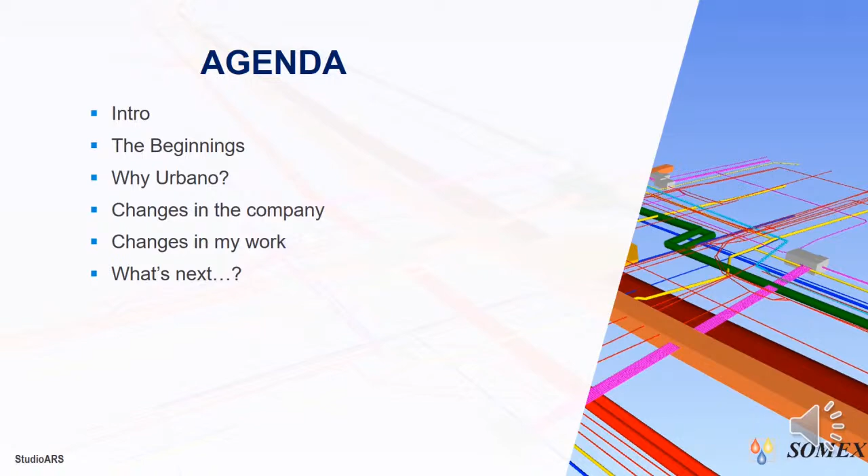Hello everyone, my name is Joanna Karczewska. Today I will present to you my way to BIM in the presentation Network Modeling, a coincidence or a conscious decision. Agenda: short intro about me and the firm, our beginnings, why Urbano, changes in the company, changes in my work, what is next. I am a designer in SOMEX.

SOMEX is a small company. The company employs 7 people, 3 of whom work in the BIM standard. We only design networks: water supply, sewage, gas, heating, and sewage pumping stations. SOMEX designs primarily in Warsaw. In the company, I am the driving force of BIM. I am responsible for implementation, development, coordination, and training in BIM.

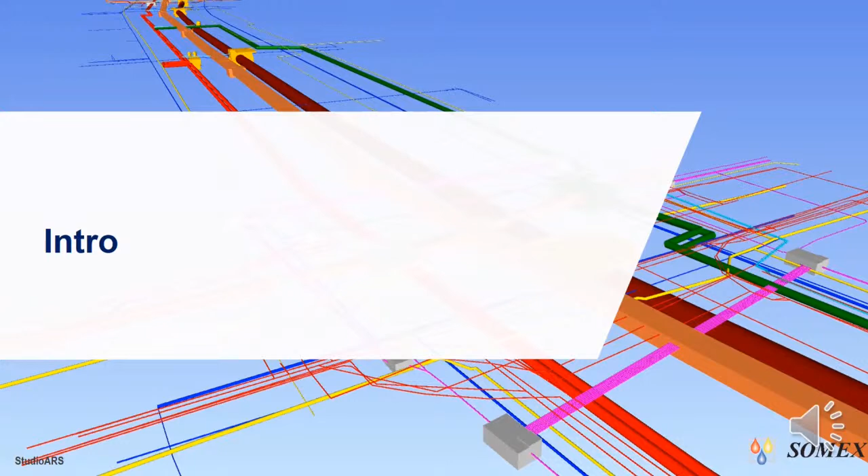Thanks to over 20 years of professional experience, I was also a site manager and supervisor inspector. I can discover and use the potential of BIM. I can also point out its new path of possibilities.

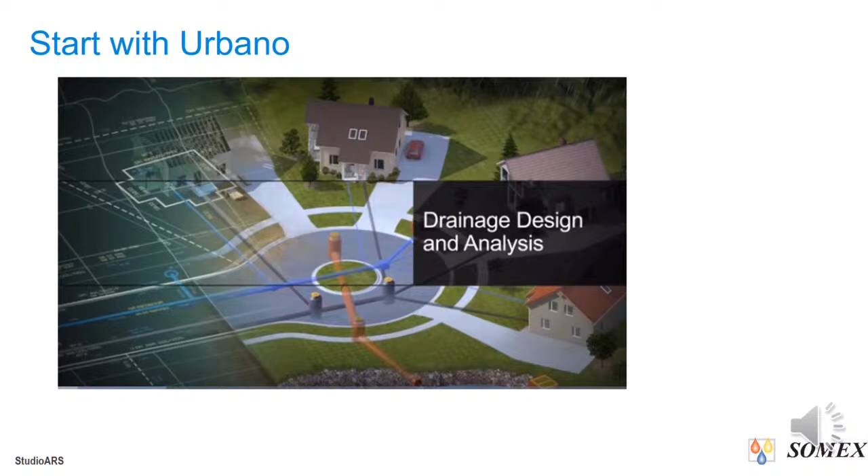8 years ago, we were looking for software to calculate rainwater drainage. Our first choice was Bentley. We tested the software and we did not like it because of difficult work with the software, complicated data entry, no choice of language versions, and high price. On the plus side, they have great visualization of the network. So we were still looking for something for us and we discovered Civil 3D and Urbano.

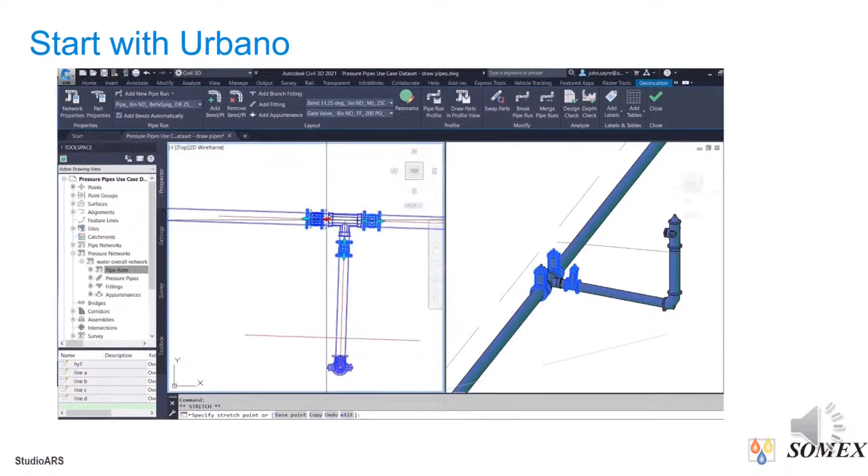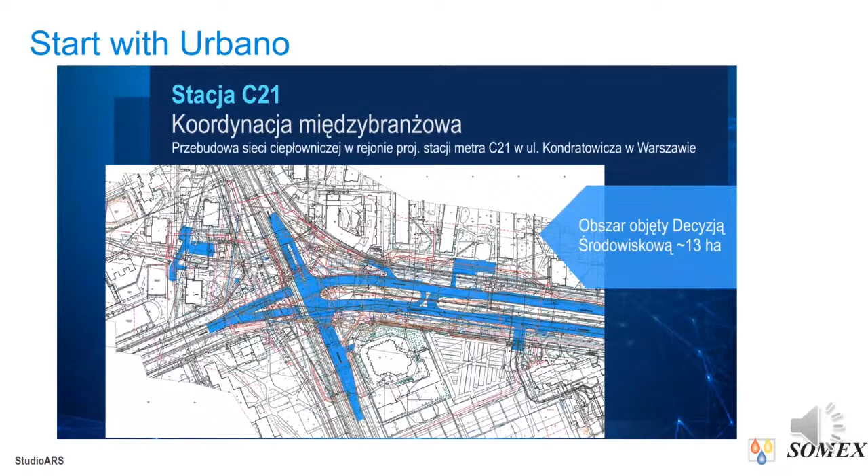Unfortunately, Civil 3D itself did not meet our expectations, and we got a cooperation offer to co-design 2 metro stations in Warsaw in the Targówek district. Our task was to reconstruct heating networks. There was only one hitch. We had to do the project in Urbano. Fortunately, we had already worked on this software.

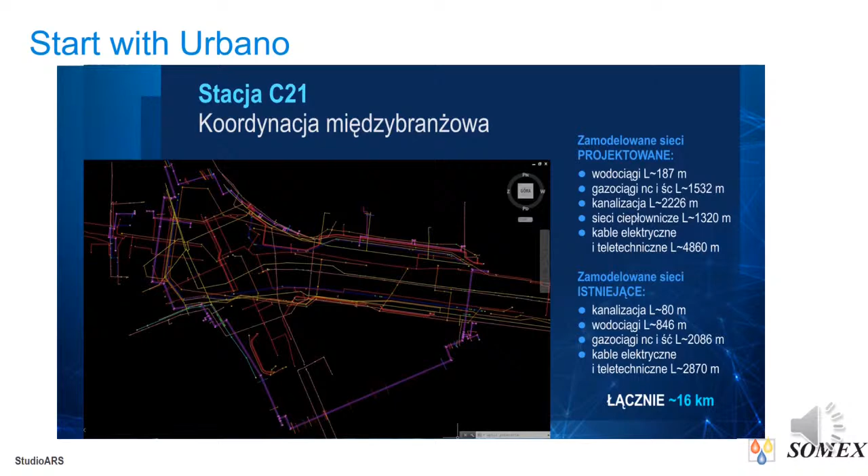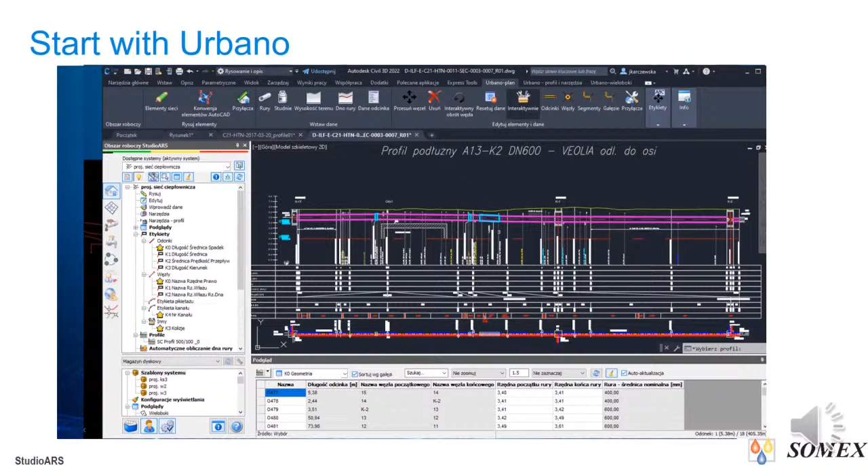We undertook this task. It was our first big test of work and co-work in the BIM environment. Fun fact, we are still modeling in BIM, but our partner is not. In our company, there is no obligation to work in BIM. Therefore, I personally chose what I wanted to do in Urbano.

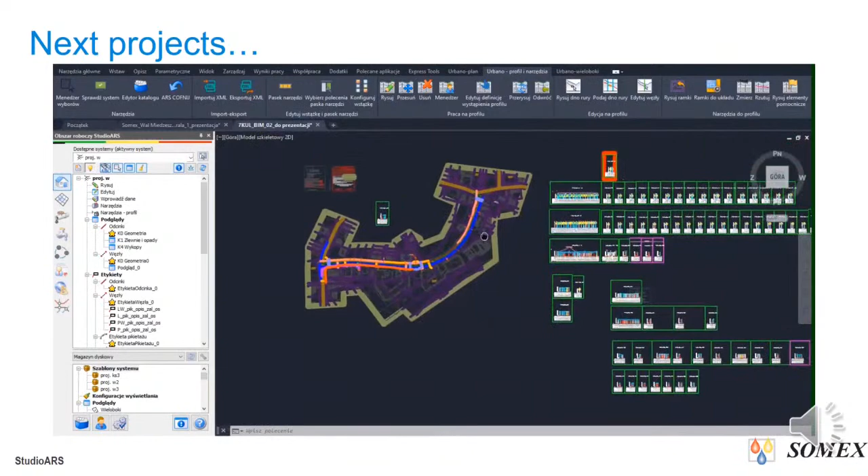At the beginning, I had three reasons for this: projects of long networks, several networks in one area, and the necessity of variant solutions. Now I do all the projects, regardless of their size, in BIM.

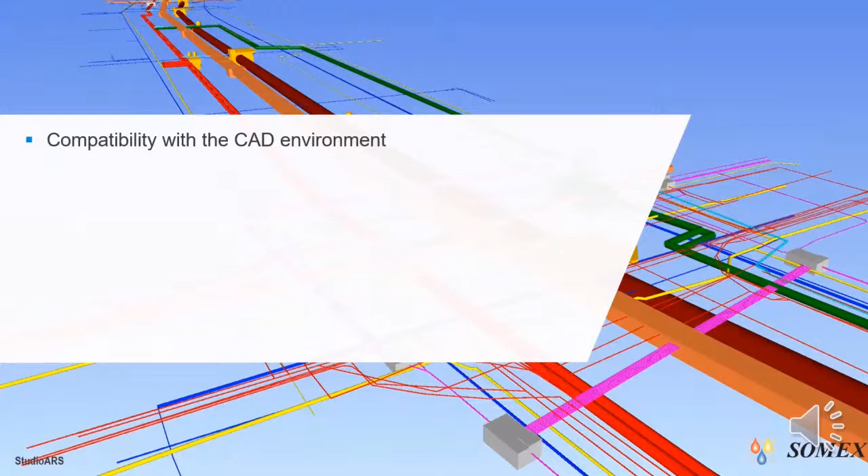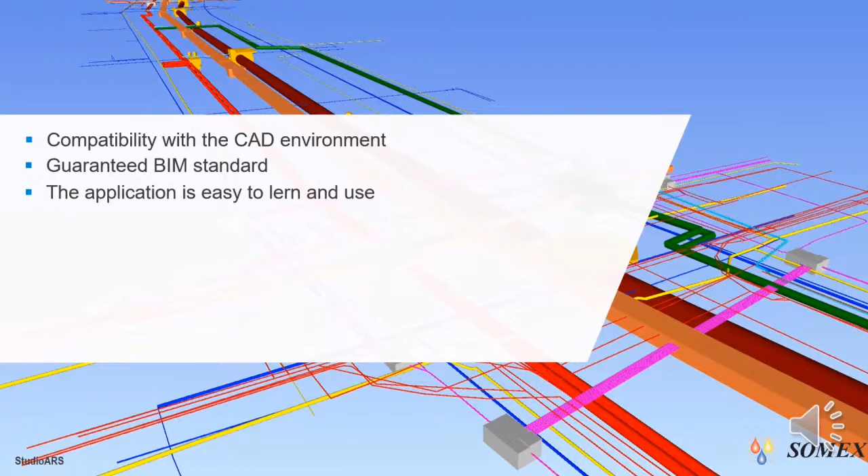Why we are still working in Urbano. The application has compatibility with the CAD environment and a guaranteed BIM standard. The application is easy to learn and use. Additionally, the application was developed by sanitary engineers for sanitary engineers.

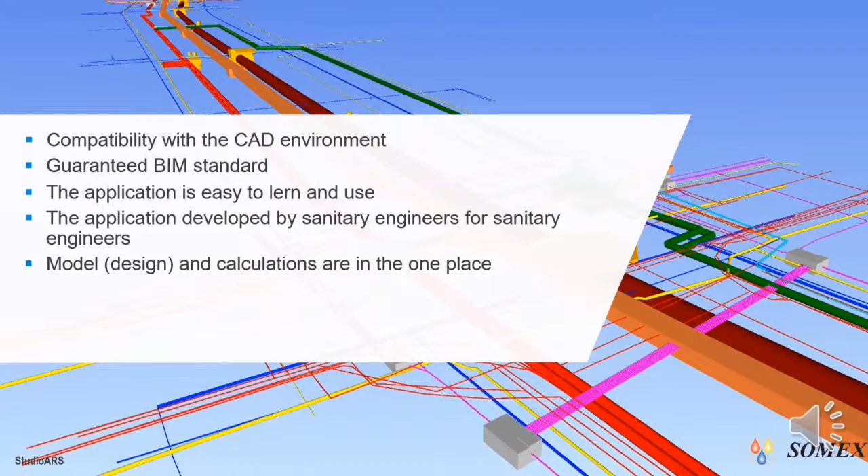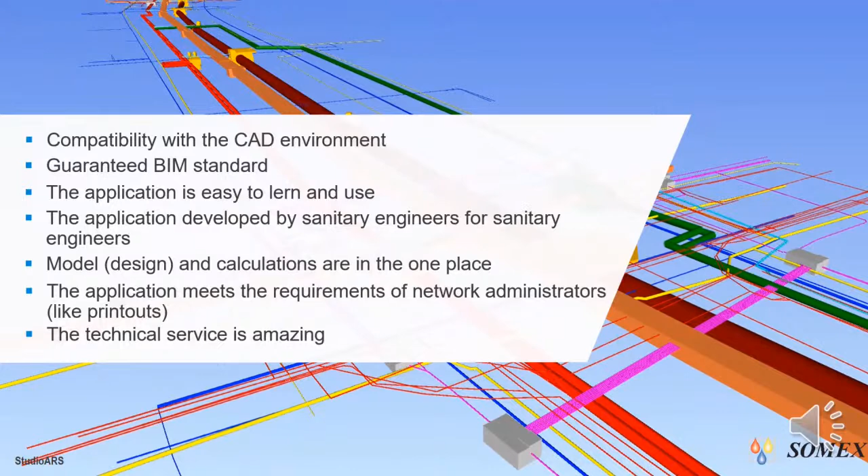Model and calculations are in one place, in one file. The application meets the requirements of network administrators, like printouts, and the technical service is amazing. Now we have better bargaining cards for participating in large infrastructure projects. The same team can design more and better at the same time compared to 2D design.

For example, this is a cross-industry project for the reconstruction of Gagarina Street in Warsaw, along with the construction of a tram track and the construction of a sewage collector. In order to show the solutions to the collisions of the heating network that I designed, I additionally modeled other underground networks like water supply, gas, power, and technical network.

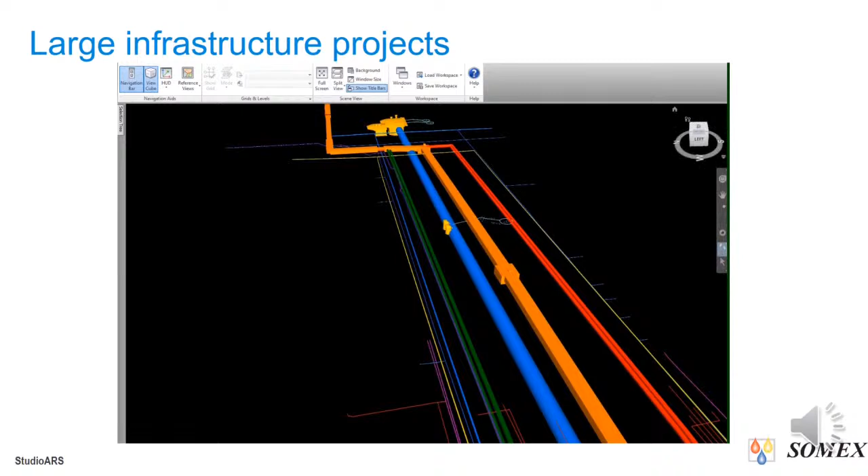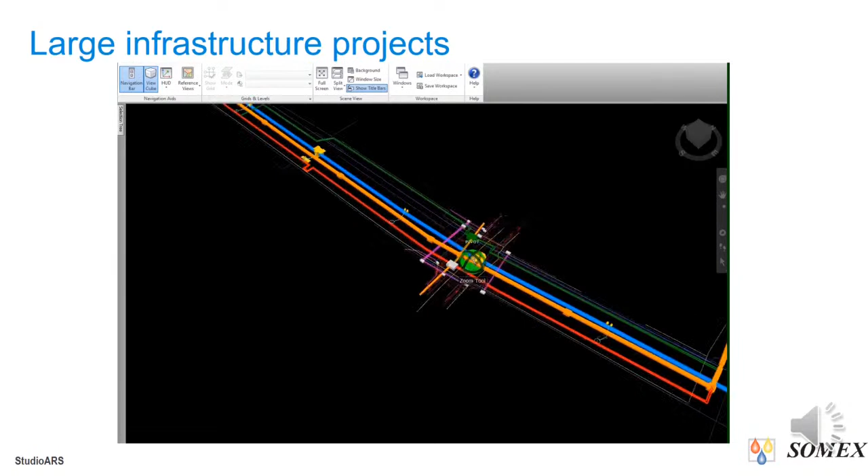In this video, the red pipes are my design, green is a variant, and orange is the network to disassemble. I especially focused on resolving the collisions in the area of the crossroads, where I showed two variants of the location of the heating chamber.

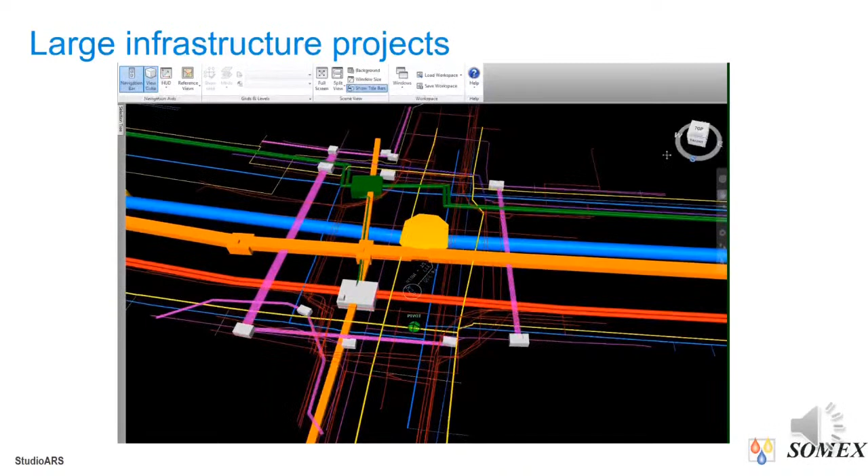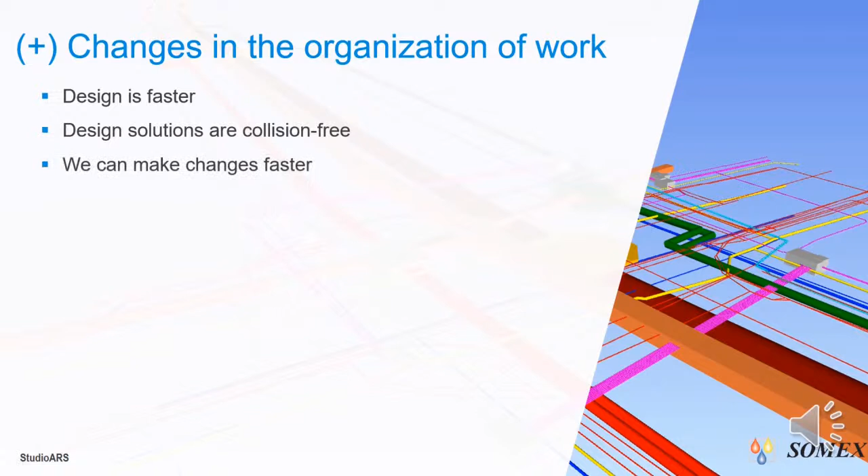Changes in the company, to sum up. Pros: changes in the organization of work. Design is faster. Design solutions are collision-free. We can make changes faster and generate a lot of different lists in any data configuration.

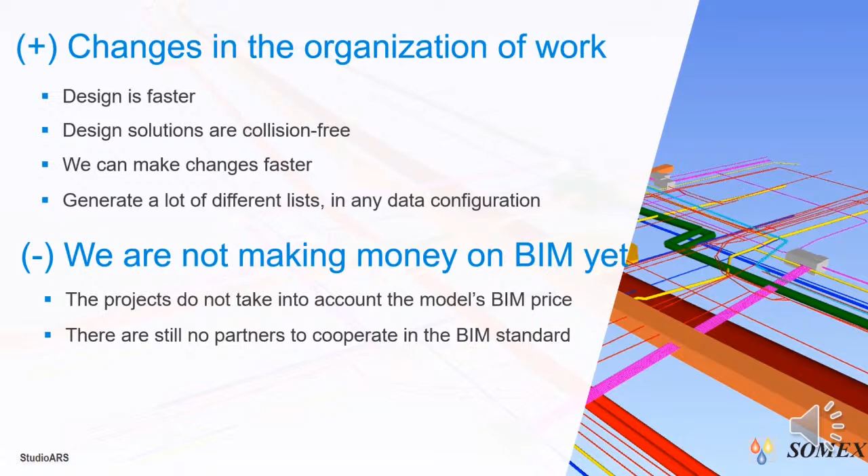Minuses: we are not making money on BIM yet. There are two main causes. The projects do not take into account the model's BIM price, and there are still no partners to cooperate in the BIM standard.

Changes in my work. Network modeling is not just a new, better tool. First of all, it is a change of mindset. The more I immerse myself in BIM, the more benefits I see. The biggest change in working in BIM is one place in design related to calculations and the possibility of dynamic modeling. I do concepts and the network calculations faster and easier, and the data is clear.

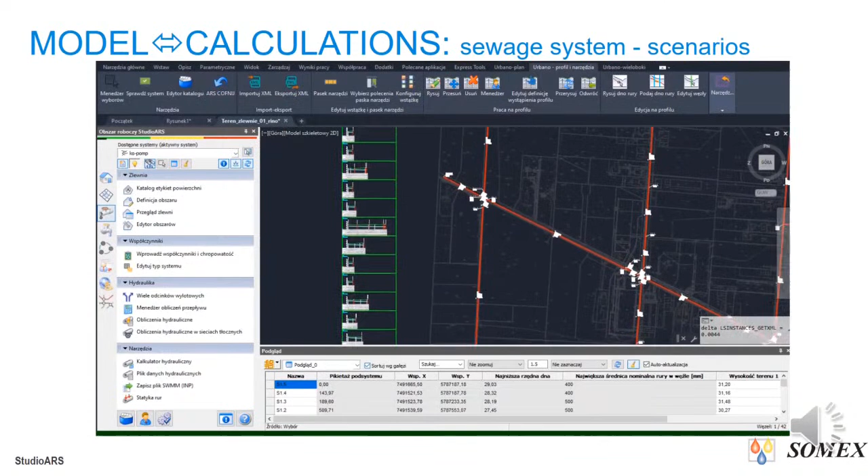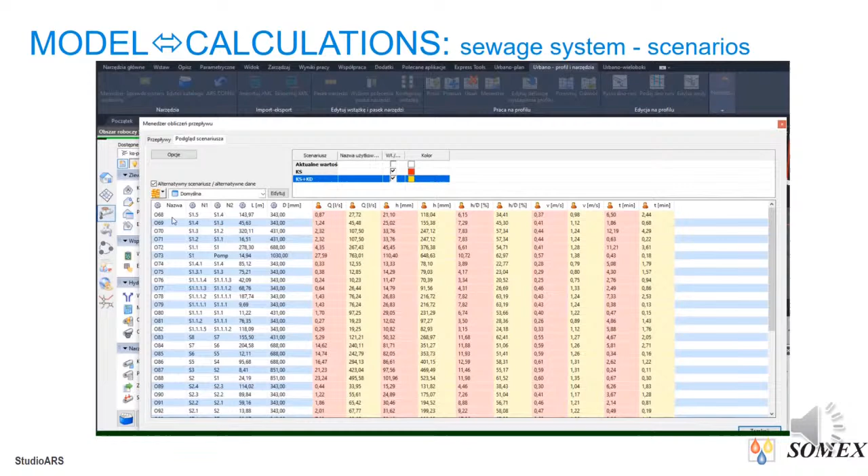For me, the important thing is that in one file I can do calculation variants for the same network layout. For example, scenario 1, sewage system, scenario 2, sewage and rainwater sewage system. I can show the calculation variants in the table with the division into colors and save it in Excel.

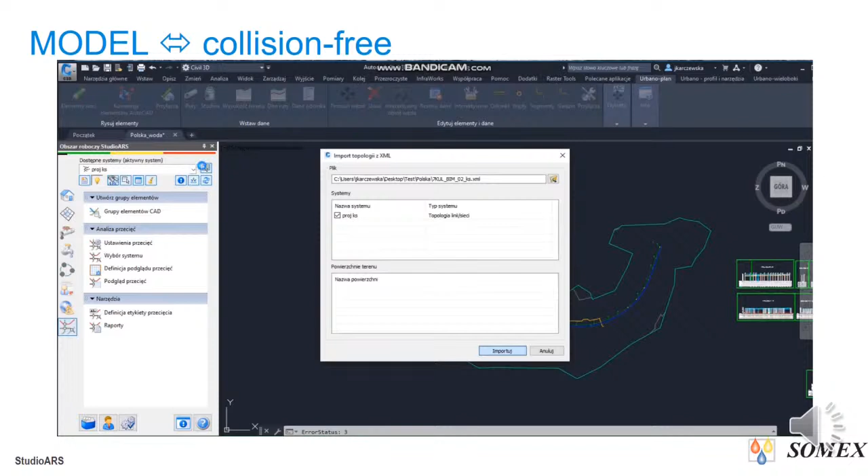The second big change is the export and import of the other systems designed by me or other designers, and the ability to automatically analyze systems in terms of collision-free. Collisions are automatically displayed on all profiles. Intersections can be viewed graphically in 2D or 3D view, and all intersection data can be viewed in tabular form and displayed in labels in plan and long sections.

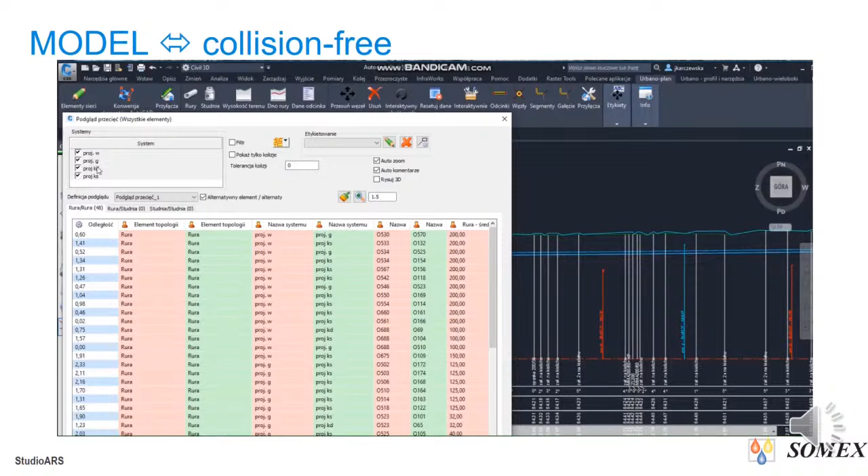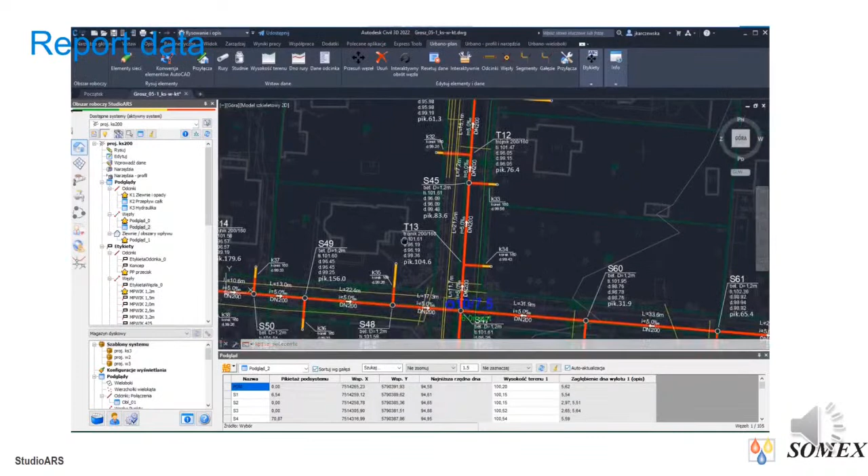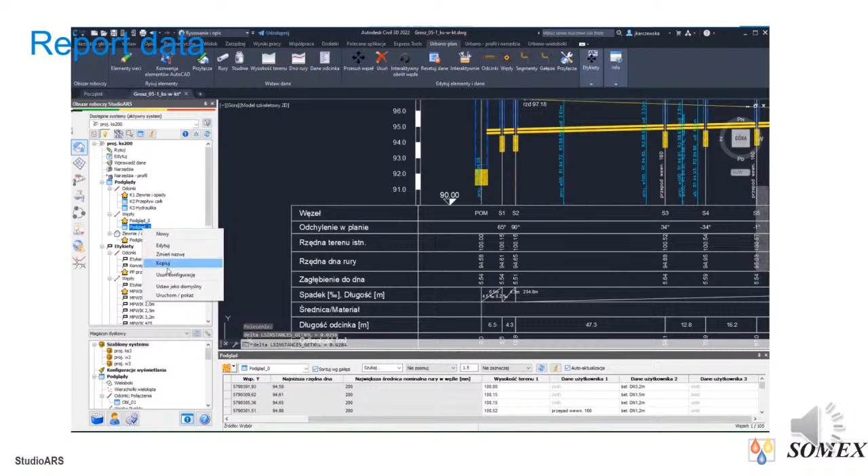It is very easy to get a report with all the necessary intersection data and save it in Excel, for example. Thanks to a wide range of sorting and filtering criteria, the model allows for detailed analysis and correction of data. In addition, at the preview level, I can enter new values such as ground height, pipe coordinates, dimensions, renaming. The preview content can be pasted into Excel or a CAD table.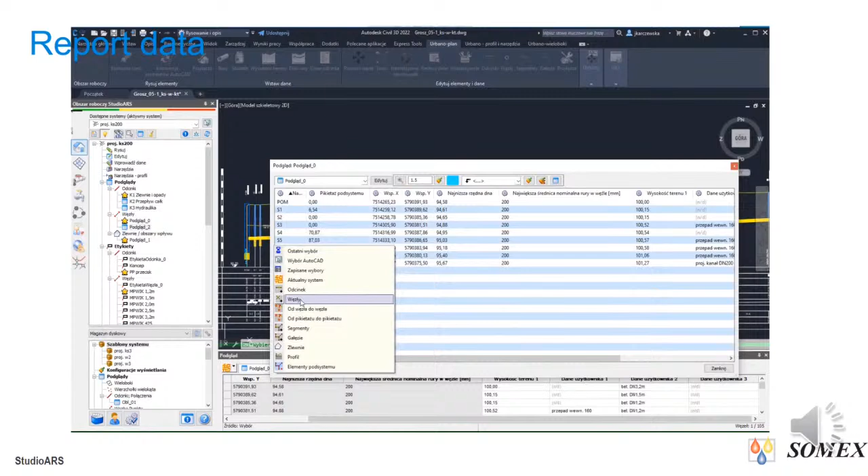I can print lists in any data configuration, broken down into branches, sections, profile from node to node, which is very useful for breaking down documentation into stages and creating lists at the various stages of the documentation preparation.

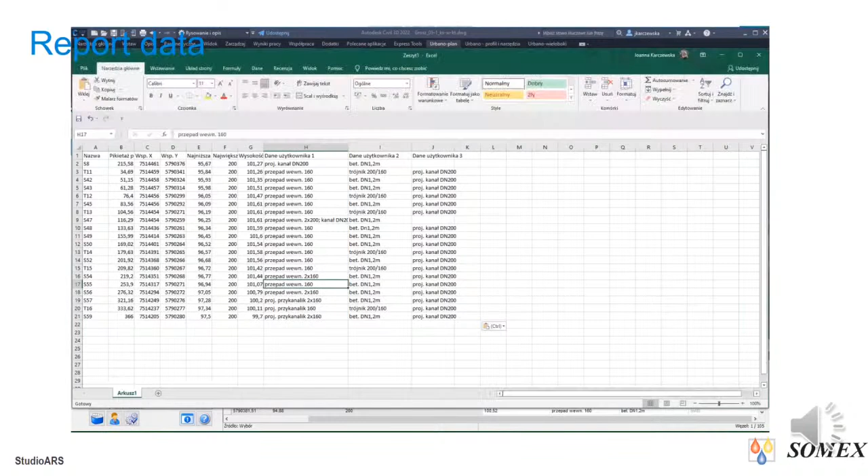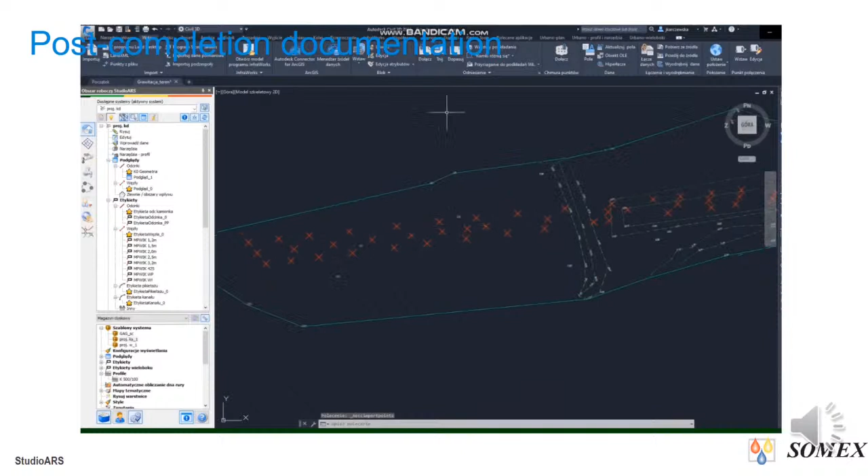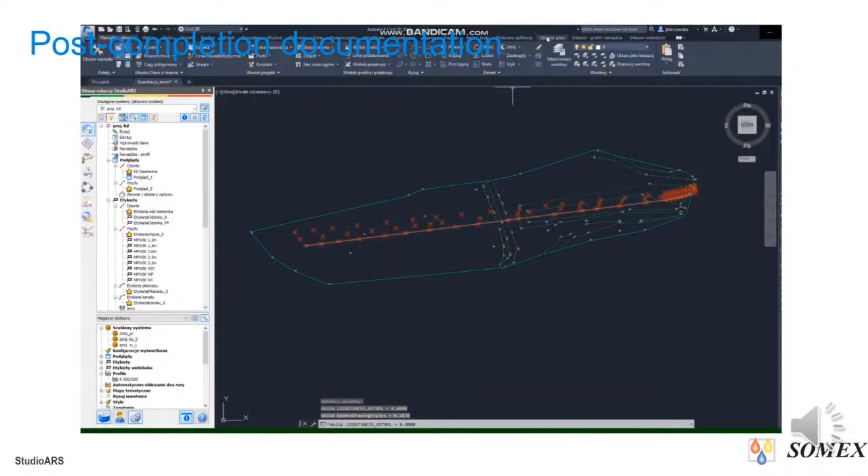Another utility that can be seen in modeling is the model allows faster and easier creation of post-completion documentation. Based on the imported points data, for example from a TXT file, I can quickly build a system by drawing a 3D polyline over geodetic points that have specified coordinates and height, from which I can generate a profile or plan. All functions happen automatically. Thanks to this, I do not waste time tediously typing data.

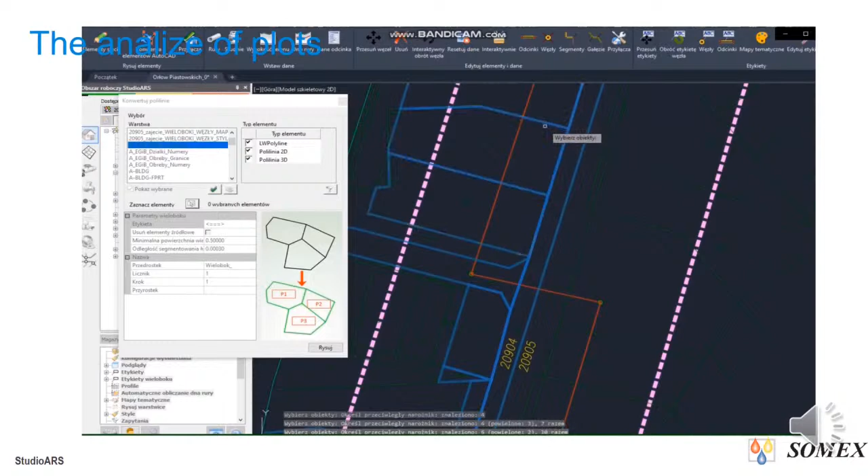Another change in my work is analysis of pipe systems with parcels. Data on intersected parcels, such as parcel number, length of pipeline within the parcel, and many others can be shown in data tables or in the long section table.

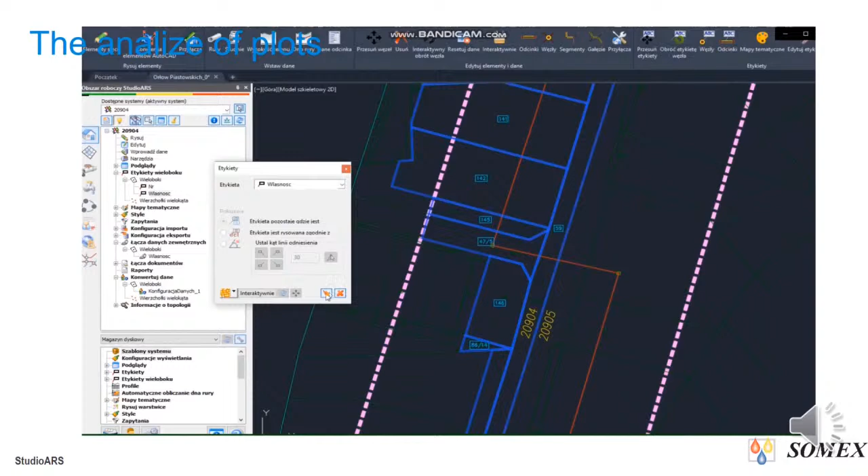Around the pipeline itself, it is possible to draw a buffer zone and perform overlay analysis between the parcel system and the buffer zone. In this way, it is possible to get all affected parcels and all data on these parcels, such as the area of the affected part and the percentage of the original parcel, which is very important information for determining the right of way and expropriation of land.

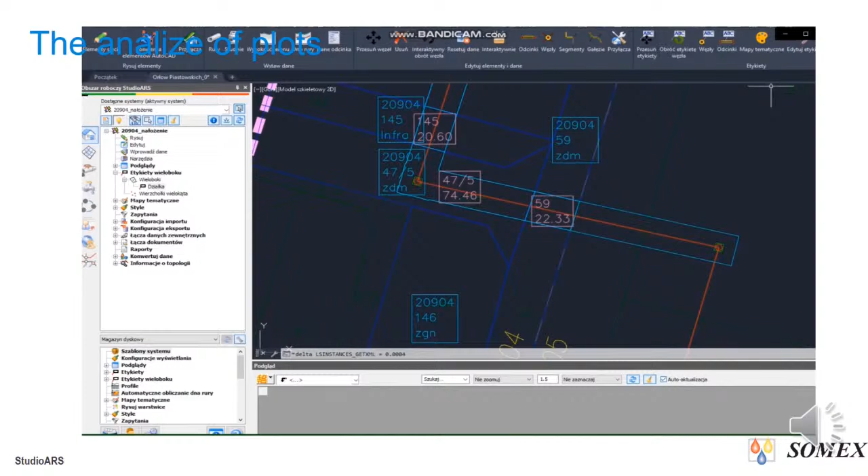The IFC standard is an open standard, also for use in free browsers, that allows me and other process participants to view the model and view the data contained in the model. I decide what data from my project will be shared. They can be basic data or all of them.

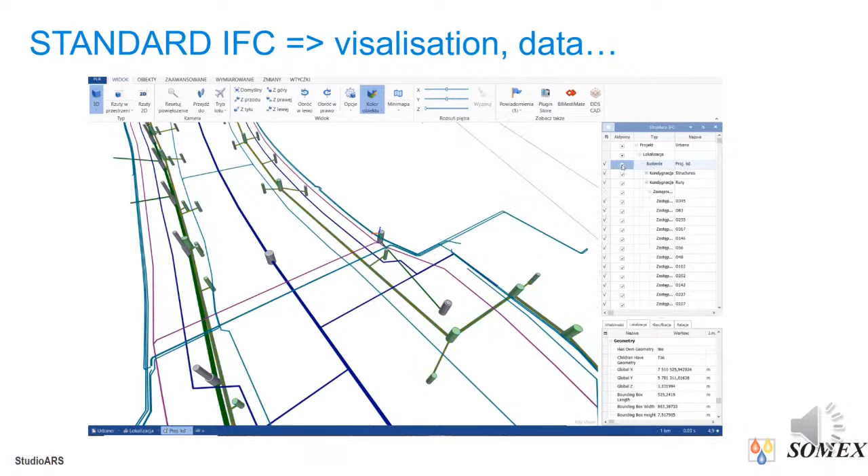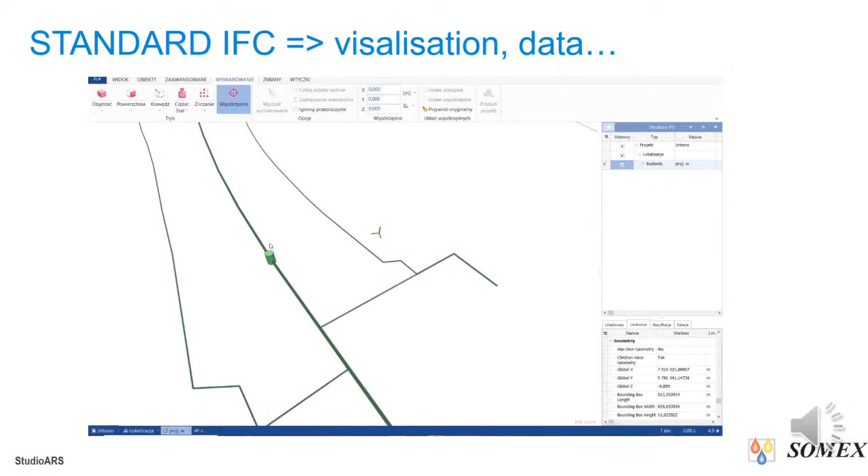The preview of the model significantly facilitates the visualization of the compaction of the designed underground networks and improves communication between participants of the investment process. This viewer also allows for basic measurements, layer filtering, data preview, and so on.

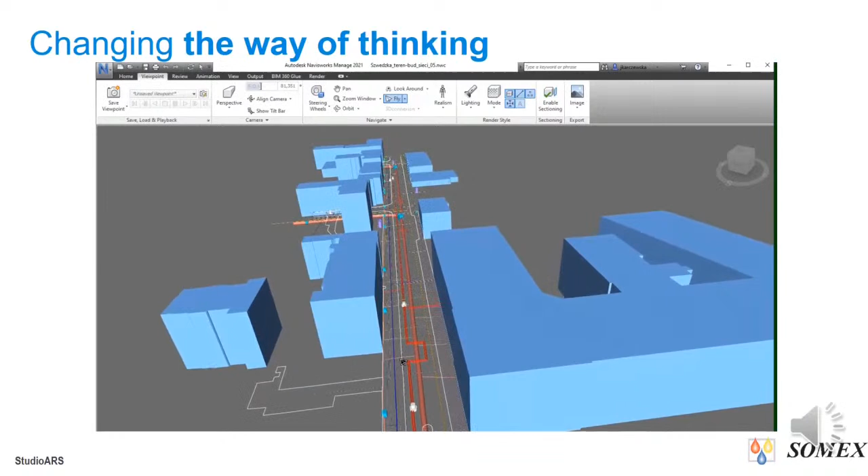To sum up, this is an example of what my projects look like now. Red pipes, that is the heating network, my project. The rest are the existing underground network that I modeled too. Despite the fact that the Urbano application is dedicated to modeling water supply and sewage networks, as you can see, you can also model other networks.

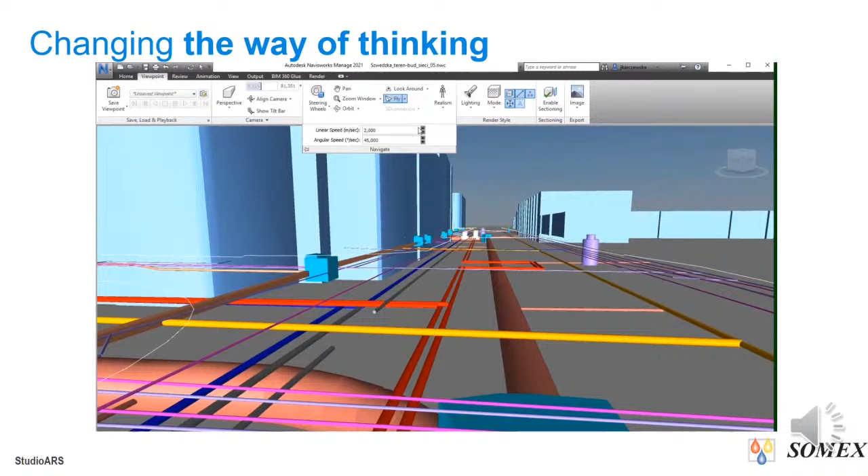A few years ago, I was at a crossroads. I had seen the future of BIM in installation, but I had not seen BIM in underground networks. I was considering changing my job to be able to design in Revit, but I like designing underground networks the most, and I have the most professional experience in this field. That's why I undertook the mission of BIM education of my industry.

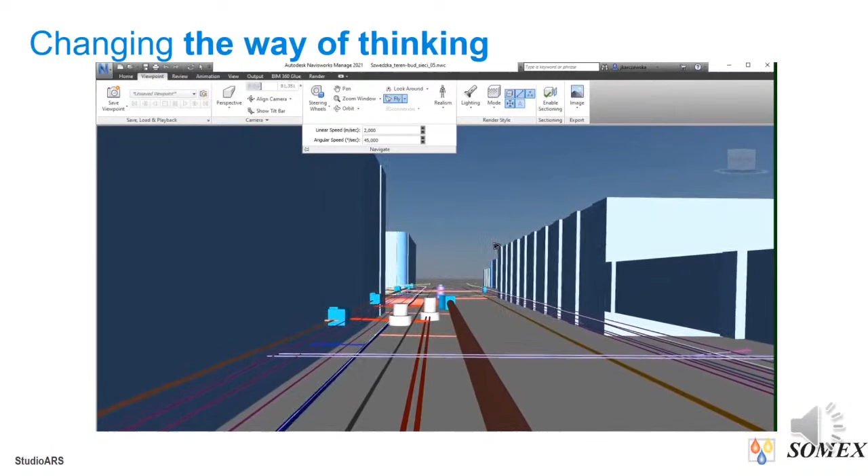My boss noticed and appreciated my efforts. Now I want to bring others to BIM, especially young people, and I run Urbano classes at the Warsaw University of Technology. I show young people a different perspective of network design, implementation, and management than the standard solution.

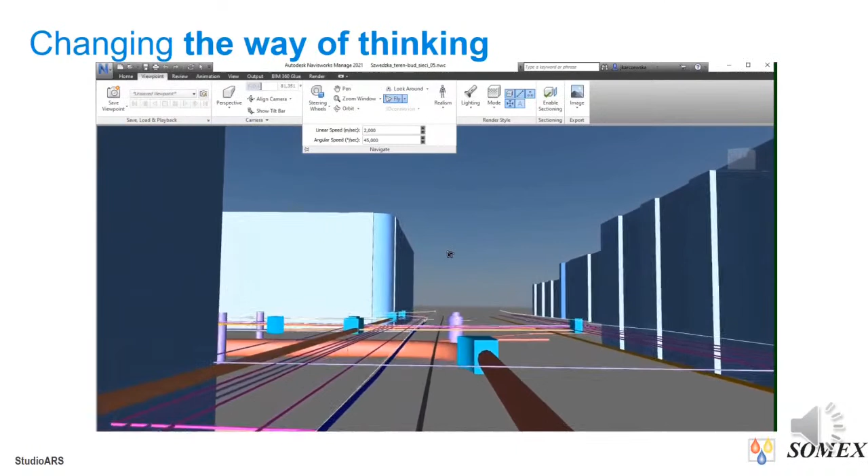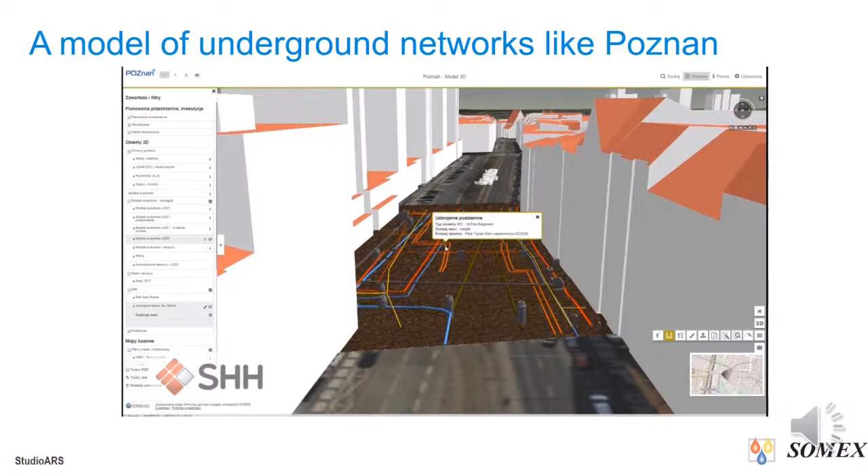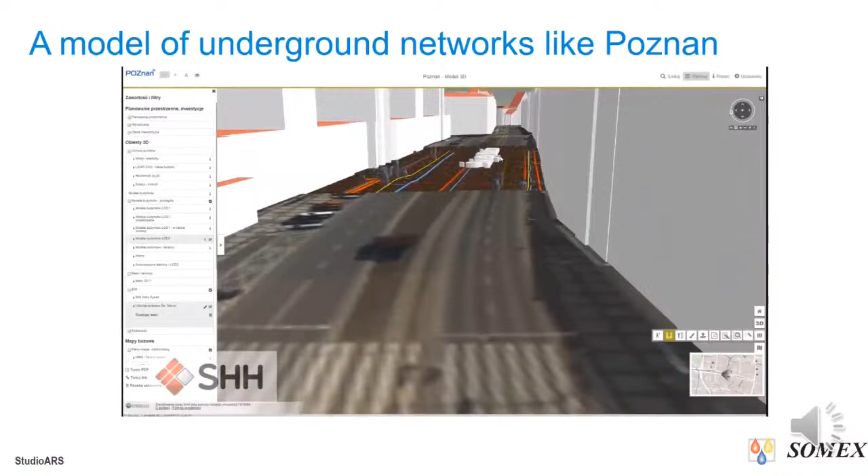What is next in our field? We were working on creating a map of the underground infrastructure of the city of Warsaw, for example like Poznan, Barcelona. The map would be a BIM model, and this model will be updated with current and planned changes. I hope that surveyors, investors, network administrators, designers, constructors, and ordinary people will be very interested in accessing the model and the data. I hope it will work.